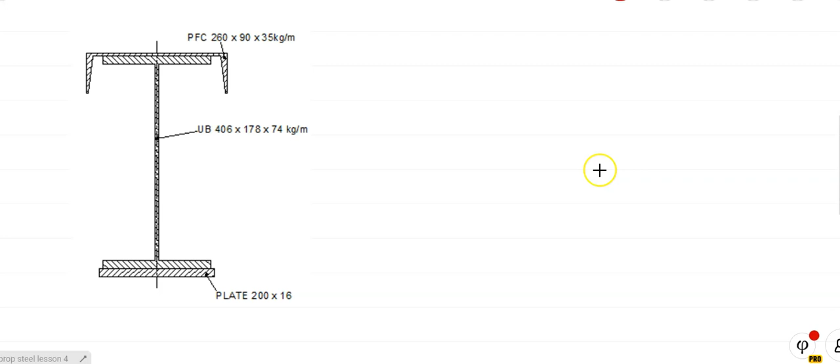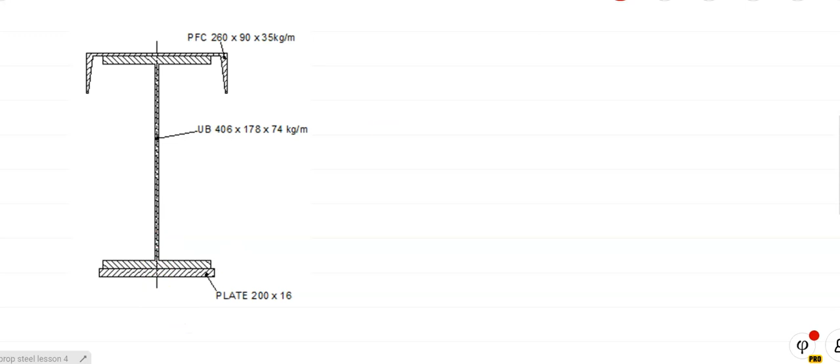The first part of the question is to calculate the position of centroid. I sort of mentioned bits of it at the end, but I should have said this as well. We have a channel, an I-section, a plate, and you can see from this compound section that there is the y axis, and this compound section is symmetrical about the y axis. Okay, what does it mean?

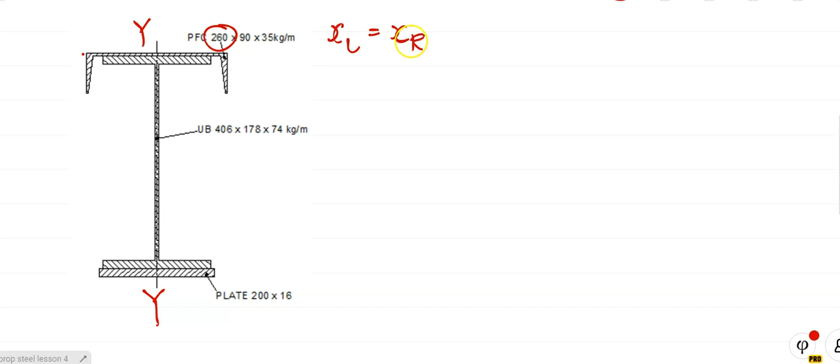I worked out y top and y bottom, but I didn't work out x left and x right. Because there's symmetry about the y axis, x left is equal to x right. So what we do is take the full width of the section, which is the distance from there to there, that's 260. So x left is equal to x right, equal to the full width of the section over 2, which is 130 millimeters. Y top and y bottom we worked out like I showed you already.

Now people, I forgot to mention this bit. Working out x left, x right, that's all there is to it. Finding x left and x right is simply a one-line calculation, and I will give you not more than 2 marks for that.

Now what some students do, they don't pay attention to that, and they work it out by taking moments like we normally do. That's not wrong, but you don't need to do that. They work about this point, take moments, and do a long calculation, wasting a lot of time, and then they get x left and x right equal to wrong answers. So they wasted their time doing all that work for only 2 marks.

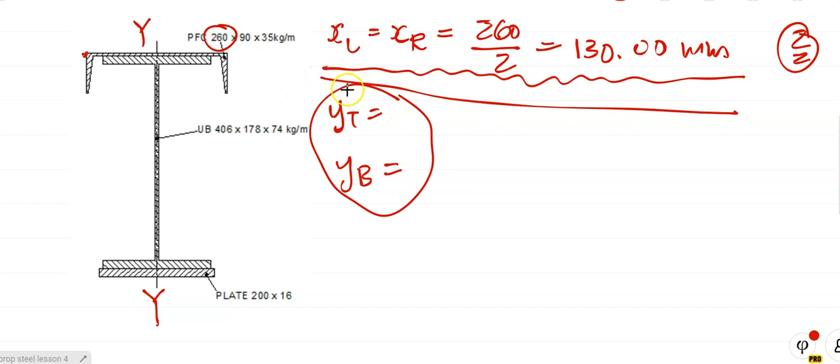So when there's symmetry about an axis, for example the y axis, x left is equal to x right, equal to the full width of the section, which is 260 divided by 2, 130, and that's it — instead of doing the long proper calculation. Okay, right, let's take another one.

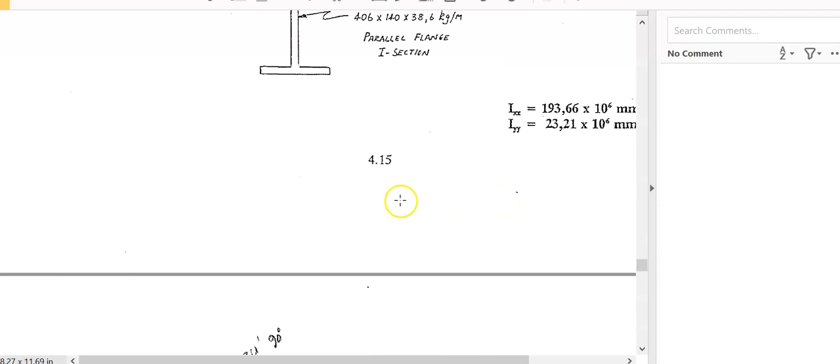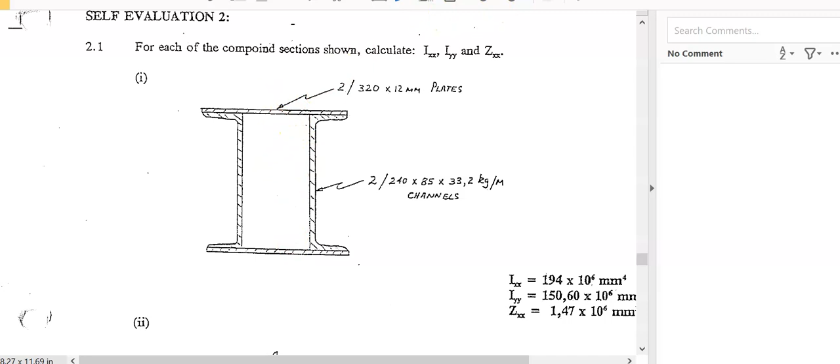Let me just do this quickly here. Let me get this right. Right, there's my y axis and there's my x axis. So that's x and that's y. And here, we don't need to do this long calculation, because there's symmetry about both axes.

So when you work this out, x left is equal to x right, equal to the full width of the section, which is 320 over 2. So x left is equal to x right, equal to 320 over 2, which is equal to 160 millimeters, and that's it.

Okay, and y top here is equal to y bottom. Can you work it out? How far is it from the bottom of the bottom plate to the top of the top plate? It's the height of the channel, which is 240, and there's 2 plates, so that's 12 plus 12. So if I take 240 plus 24, because there's 2 12mm plates, divided by 2, y top is equal to y bottom, equal to 100 and...